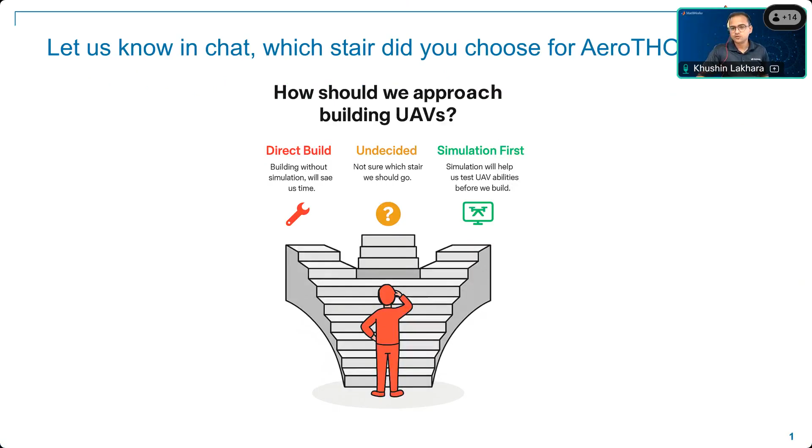Hope all of you are doing well and getting ready for your AeroTHON competition. But before we get into today's agenda, I want you to answer in chat about this picture on your screen. Which stairs are you going to take? How are you building your UAVs?

Let's make it easier for all of us. Let's use R for red color, orange for undecided, and green for simulation first. Let me know which side you are on: are you directly building your UAVs, or doing simulations first and then making your UAVs work, or still undecided how you're doing it?

Okay, are these saying they are going for simulation first? Good, I'm interested to know why you guys are going for simulation. Why not directly build it? Doesn't simulation require extra time?

Anyone other than Adi?

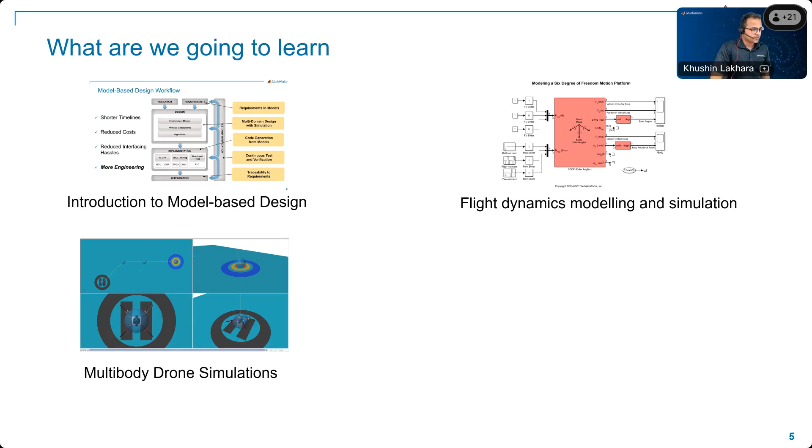In today's session, we are going to learn about simulating drones with Simulink, starting with an introduction to model-based design - what is it about, and why is it important? Moving forward, we'll talk about flight dynamics modeling and simulation - what is flight dynamics, how is it important, why should we do it, and what are the various ways of doing it? We'll also talk about multi-body drone simulations, where your vehicle has to drop a particular object to a target location, or anything where multiple bodies are involved - how do you bring various CAD geometries within the Simulink environment and perform the simulation? Finally, we'll talk about what resources we have for the AeroTHON teams and how they can make the best use of these learning resources.

So let's start with the first session. But before I go to model-based design, I would like to ask the audience: what is your motivation to learn about simulation? What do you think? Why is simulation important for you?

I see a lot of students are there. I see someone named Challenges - I'm believing this is a team name, Challenges. Then I have UIET Fire Flies, Charita - anyone who wants to take a wild guess on this?

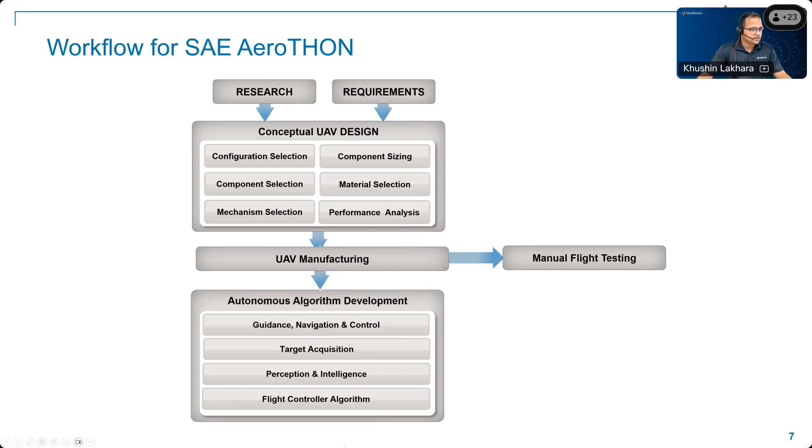So they would work on these algorithms, and finally they integrate with hardware, which makes them ready for the autonomous flight testing. So this workflow, if we compare to what is used in the industry, this is similar to the traditional design workflow, where first a vehicle is designed, then the algorithms are developed and implemented, and finally they are integrated with the hardware. So now let's look closely and understand what can be the problems with the traditional design workflow.

One thing I see is there is no feedback in this process, and if we don't have the feedback, we will not be able to improve our design. So think about you are at integration stage and you found some error which is coming from your requirements change, or which may be coming from any other change in design. And now it has affected your complete design cycle. So how are you going to handle it?

So yeah, that comes with another quiz for you guys. What do you think? What are the problems with the traditional design workflow? Starting from Aryan saying it may be time consuming and repetitive.

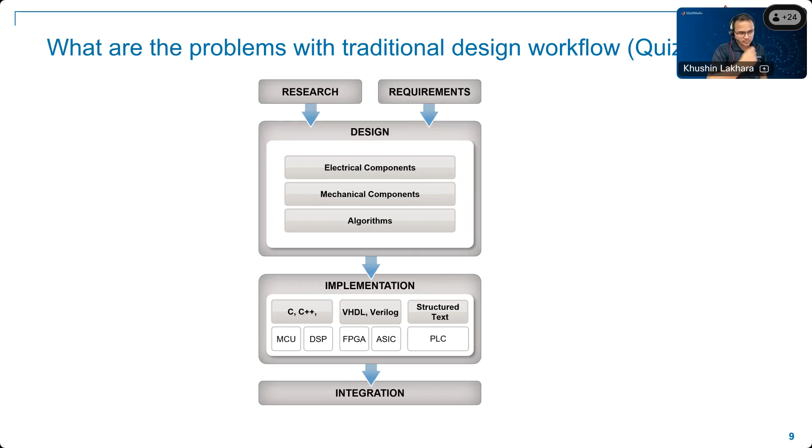Very true, Aryan. So let's explore these problems one by one, starting from the requirements. Requirements are in the documents or written somewhere. So if your requirements are changing, you are not able to make the immediate change in complete design. That means you don't know if your requirement A is changing, which component B, C, or D you need to change in your rotorcraft. That's one of the biggest problems.

It involves physical prototyping. Physical prototyping is obviously expensive, prevents rapid iteration, no system level testing. These are some of the big problems, and they actually make the complete engineering design cycle costly.

Moving forward, it's manual coding, time consuming. Manual coding is obviously time consuming, and because it involves humans, you can always introduce defects and variance, and if some other team members are using it, then it's difficult to reuse.

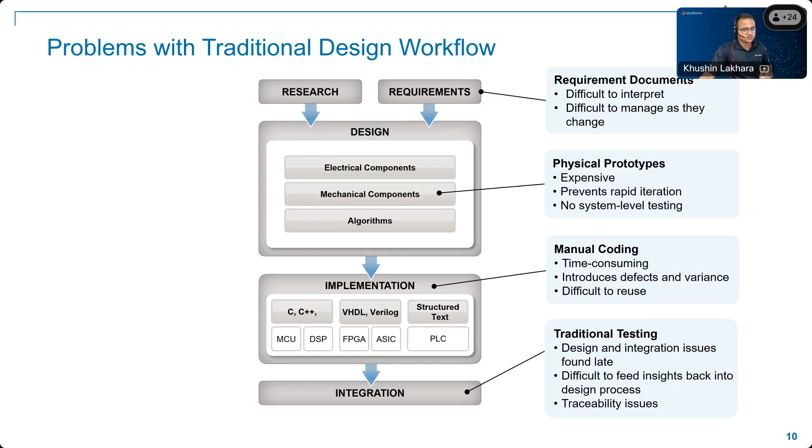Moving forward, they go for traditional testing. So design and integration issues are found very late. Now, if you have any issues in the requirements, you have to go back to the requirements and restart the complete phase. But you are not able to understand that making the change in the requirement is going to impact which subsystems or which components. So this brings the traceability issue.

So what's the solution? The solution is the model-based design workflow, which industry prefers, and most aerospace companies across the globe prefer this workflow. So they put the requirements into the models. These are simulation models, instead of writing them in a Word document and then making the changes in the design.

They mention the requirements in the models, because these designs are multi-domain designs, and you can do multiple simulations. So the requirements are always directly affecting your designs, and you are able to see how the requirements are related to your design configuration.

Moving forward, for implementation, no more manual code writing—you generate the code from models. You don't write any more code, but you develop the algorithm. And for the algorithm, whatever programming language you need, you generate the codes for them—either C, C++, or your hardware's specific requirements. You generate the codes, but from standard templates which are compiled with industry compliance.

And then the main feature is it has continuous test and verification as part of this workflow. So whenever we are making any change, or even at the early stage, we are always testing how our model is going to perform and how it affects the subsystem level, complete system level, and assembly level. So that brings another benefit.

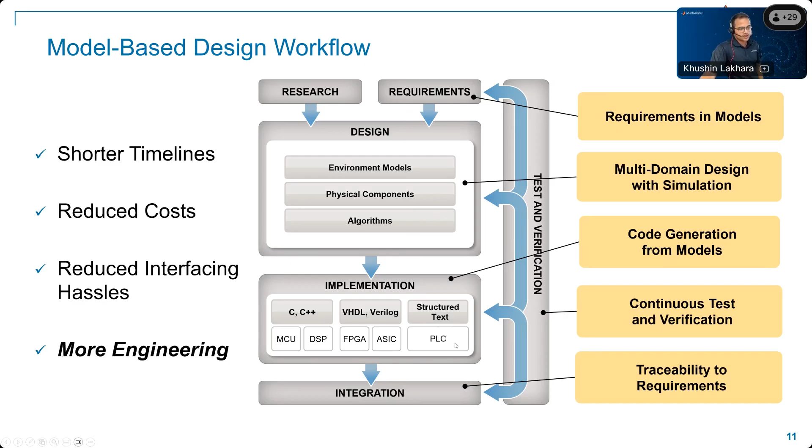So which tools can you use for model-based design? There are tools, MATLAB and Simulink.

If you guys are new to MATLAB and Simulink, MATLAB is the language of technical computing used by scientists and engineers across the globe for numeric computation, data analytics, visualization, algorithm development, and deployment. We have more than 130 toolboxes, starting from audio toolbox to aerospace, with wide industry applications. We also have Simulink, which is a platform for model-based design, used by industry as a block diagram modeling approach for modeling, simulating, and analyzing multi-domain systems. It has automatic code generation capabilities, which saves you from writing code, and has huge applications in control systems, signal processing, communication systems, and more.

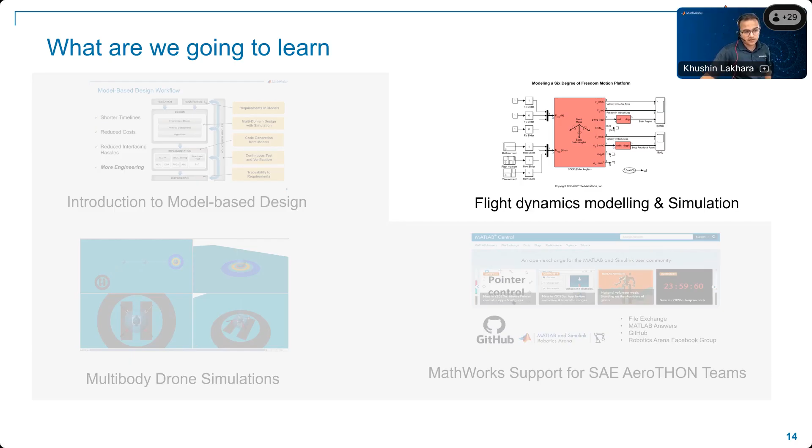Now that we've learned about the tools for model-based design, let's move forward to the main meat of this webinar: flight dynamics modeling and simulation. That's where we're going to do a technical deep dive into the aircraft dynamics of a vehicle, or how an aerospace vehicle actually works.

Before we go there, another quiz: why do we do flight dynamics modeling, or 6 degree of freedom modeling? Why is it important? Can we not just bring the various parts into the simulation model together and see how they impact each other? Let us know in the quiz, I'm waiting for your answers. We have limited time—the more we interact, the faster we go, the better questions we have, the better answers I'll have, and we'll have a much more impactful session. By the end of this session, I want you guys to walk away with learnings you can directly use for your AeroTHON competition.

Om is saying to get the movement of the bodies in 6 degrees of freedom—true, you can. Ishant says to be able to trace the trajectory of the drone. If you can trace the trajectory of the drone, you can see if your vehicle will be able to complete the mission or not. Ashish says since the UAV's whole system is like a Rubik's cube, every movement needs to be taken into consideration. Yeah, true—a drone is a free body, unconstrained, or inertial relative body. So yeah, it's a free body.

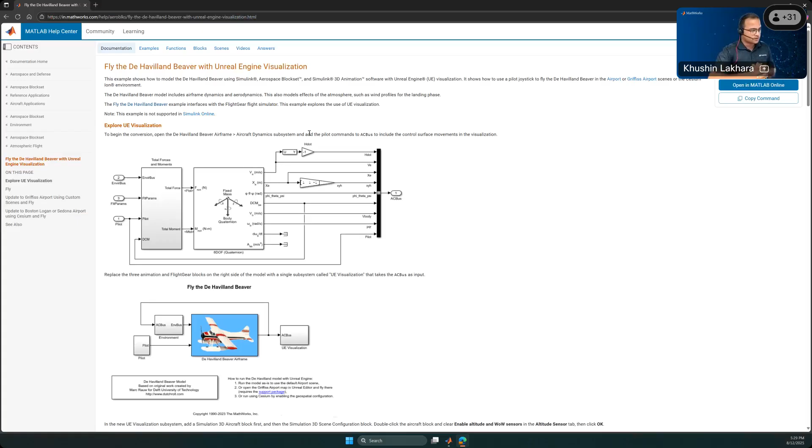This example that we are going to share here is easy to access — I'll share the link in the chat, but let me show this for you. So if you search for the De Havilland Beaver Unreal Engine visualization — MATLAB has a large documentation for most of the workflows, and you can search about simulating your aircraft, simulating rotorcraft, or whatever terms you have, and you may land on some of the most relevant documentation. So this is the example we have, and I'm going to copy this command from here and quickly go to my MATLAB and call this example here.

Before we get into the simulation, let's talk about a few more things. We talked about what a simulation needs — how the 6 degree of freedom and equations of motion are needed. But in order to create a simulation, we need something more. So what are these things?

Here we were talking about aircraft dynamics. Aircraft dynamics includes your various forces and moments along with your 6 degree of freedom equations of motion. Now consider if you have this aircraft dynamics available, we may be knowing the initial states of our vehicle — is it at the ground ready to take off, or is it already in air? What is its speed? What is its orientation? So if we have this information, these are all the information parameters, the state parameters that we consider.

If we have the information about states and we are putting some control, this control is you. In the case of fixed wing aircraft, it may be your engine throttle or control surface deflection. But in case of rotorcraft, it's mostly the throttle of various rotors.

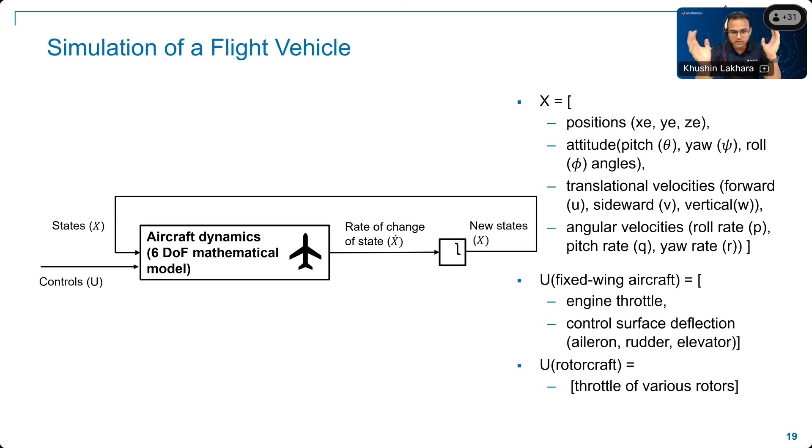What do you think is still missing to make it a realistic simulation? To bring in the conditions in which you are going to fly the aircraft, what is missing here? This is just the basic parameters we got, all the X parameters. So just looking at the numbers, will we be able to do good with the simulation, or do we need something else? What can be the additional things we may need here?

In the meantime, let me go to MATLAB and bring other things into the simulation.

Okay, so this model, when we give this command, the simulation model will open. Let me open my simulation model. So this aircraft simulation model is available. Yeah, this is our aircraft dynamics.

Let's get into this, what we were discussing on our simulation. So this is our aircraft dynamics model. As we were discussing, we need to calculate first total forces and moments and feed that through the 6 degree of freedom equation of motion. Through the equation of motion, we will get all the parameters.

So we can see here, we are putting in all the forces and moments, and what we are getting out are the velocities, the positions, phi theta psi which are your orientations, and direction cosine matrices, which are useful to change your navigation and aircraft's motion from body fixed frame to the inertial frame. Also, we are getting various velocities, angular velocities, and acceleration.

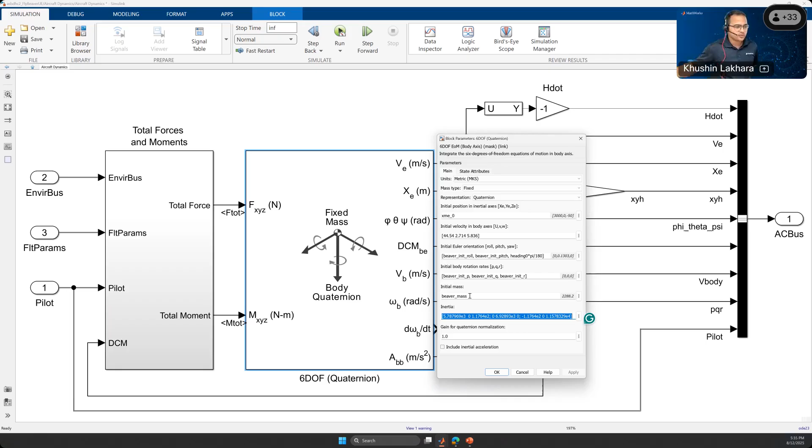Let's get into this total forces and moments, because it is getting the inputs of total forces and moments. But you would be curious, where do we get this 6DOF simulation block? Any ideas, guys? If anyone is already using Simulink, can you let us know? If I delete this and want to get the Simulink block again, from where will I get it?

You may be thinking I have messed up the Simulink model, my simulation model has gone. How will it work? I don't have the equations of motion. Do I need to code for it?

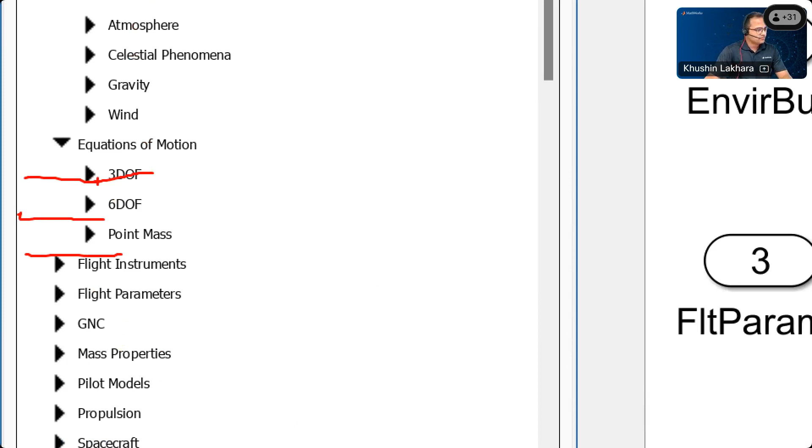We'll talk about when you should use point mass and when you should use 6 degree of freedom when we discuss the various fidelity levels. But understand that if your system has only 3 degrees of freedom, or you want to study only a few motion parameters, you can go for the 3 degree of freedom as well. But for the full vehicle study, you should go for the 6 degree of freedom.

If you go into the 6 degree of freedom, you will see there are so many blocks available: Euler angles, quaternion, ECEF, wind, six degrees of freedom wind. All these blocks are available here. It's very easy to bring this block, just a drag and drop approach to place it here.

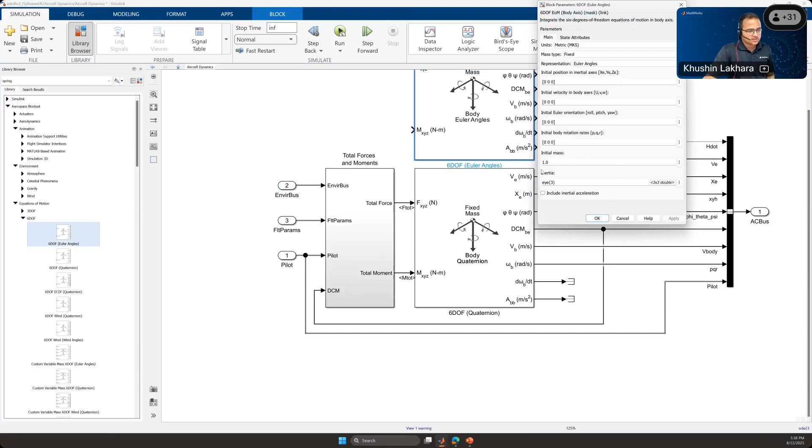Let me bring it here. And now if you open it, you'll see that all these parameters are initially 0, 0, but you can change these parameters, how this was done for the existing 6-DOF model.

Now in Simulink, it is quite easy to connect the signals. Simulink is all about flowing signals from one parameter to another, and that's how you connect your input output from one block to another block. So you're not doing the coding, but you are actually programming in a graphical environment.

Let me delete it and let's move forward and see what we've got in the equation, total forces and moments. If we get into the forces and moments, you will see it is getting 3 inputs: pilot, flight parameters, and also inputs from the environmental parameters.

Let's talk about the pilot parameters first, which are nothing but the control of your vehicle that you are giving. Then we have the flight parameters, depending on what is your angle of attack, what is your side slip angle, how the air is impacting your vehicle - these come as flight parameters. Finally, environmental parameters are there, which include your gravity and density. So these are three major parameters we get as inputs.

But if you look at this, there are three major types of forces we discussed here: aerodynamics forces, engine forces - which are nothing but propulsive forces - and then we have the gravity forces.

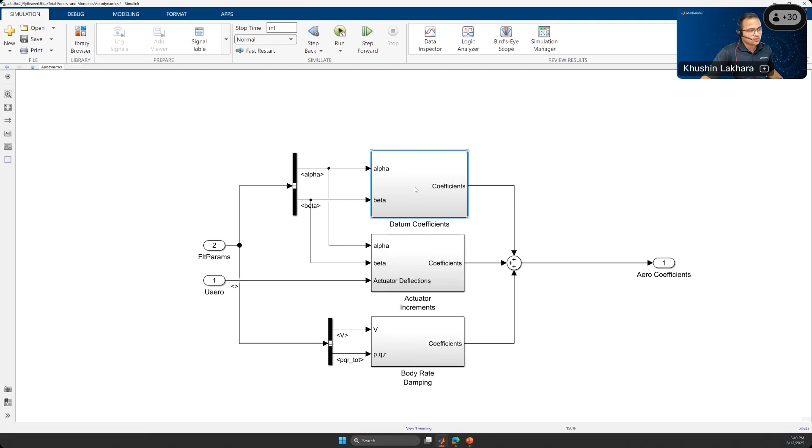If I get into the aerodynamics, you will see it has the aerodynamics equations in detail, brought together and summed. All the aerodynamics coefficients we get have been calculated: Cx alpha, Cyl, Cy beta. All these are calculated and used here as a single value. You can see that Cx alpha has this specific value of 0.00292. This value has been given and the system takes it, and accordingly makes all the calculations. That's how you do your aerodynamics modeling.

Similarly, you do the propulsion modeling and gravity modeling. So now aerodynamics and engine forces, which are propulsive forces, actually contribute to your forces and moments both. But kindly note, gravity does not contribute to the moments if you are calculating all the moments about your center of gravity.

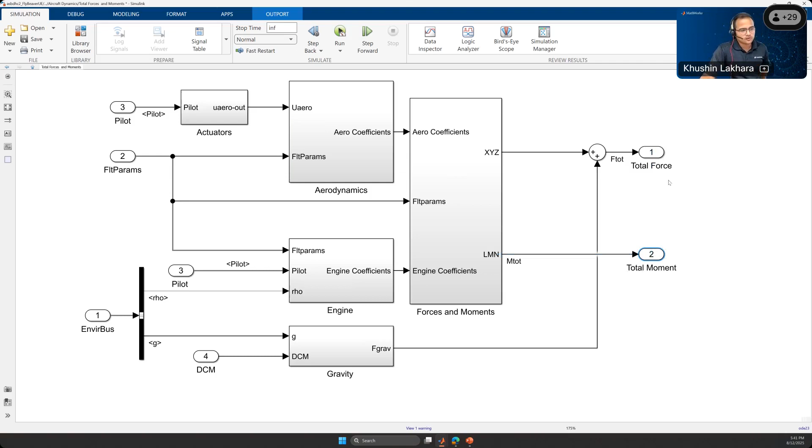And this one, we are calculating about the center of gravity. So we do not have contribution to the total moment, but we have contribution to our system here, as total forces only, not moments. So that's how we are doing our total forces and moments modeling, and our 6 degree of freedom modeling and aircraft dynamics.

I know we have learned a lot of things. Before it gets boring, let me show you, if we run this simulation, how does it look like? So we have something exciting, that's why we are learning about it.

Okay, this is my simulated aircraft environment. My aircraft is flying, my hands are free. You can see no pilot is controlling as of now, and my aircraft is just crashing. Although I have a pilot joystick here using which I can fly, but I'm not using it as of now. And you can see my aircraft has crashed and went into the ground. But this is the photorealistic simulation we have.

Let's run it again and see. So we saw that we have an aircraft body which is flying. Then we had an airport environment where our aircraft is supposed to land, but it crashes, that's a different thing. But our aircraft is flying over an environment, so this is our 3D scene along with our 3D aircraft body.

Now the idea is how are we going to get this visualization? So are you excited to learn how you can get these visualizations and all the parameters from aircraft dynamics? These motion parameters, velocity, your location, position of your vehicle, how are you converting them into visualization? Are you excited to learn about that? Let me know yes or no.

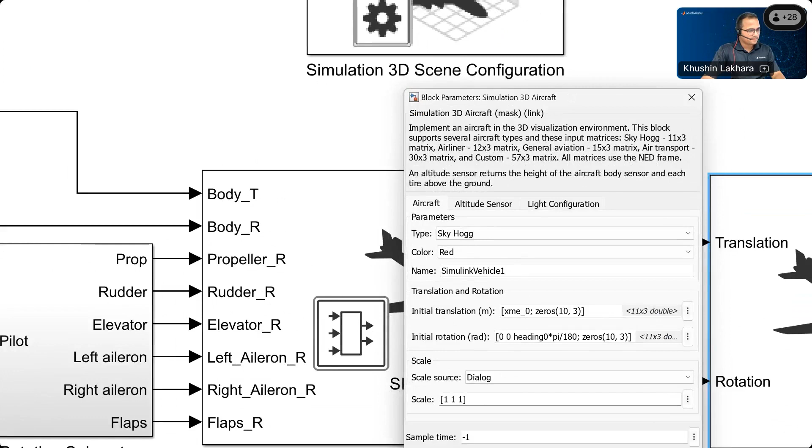So if we go here, let me just zoom it for you guys. You can see here that we have an already existing aircraft, the Sky Hogg aircraft, which is mentioned here. Then we have the name of the Simulink vehicle. We have also mentioned initial translational and rotation.

You would be thinking, we already mentioned the initial translation and rotation in the 6 degree of freedom block, so why are we doing it? When we do it in the 6 degree of freedom model, it's more for flight dynamics calculation. Here, when we're doing it, it's more for visualization purpose. Now we are bringing our vehicle into a 3D environment, a 3D world, where we should tell, hey, in this world, my GPS coordinates are XYZ, or my location is X, A, B, C. That's the purpose for mentioning the initial location, initial translational rotation here.

You would be thinking, good enough, we do have the Sky Hogg aircraft, but can we bring our own aircraft? Does anyone have this doubt, whether you can bring your own aircraft or not? Just let me know in yes or no, you can just type Y or N, that's fine with us. Yes, yes, yes. Okay, good enough.

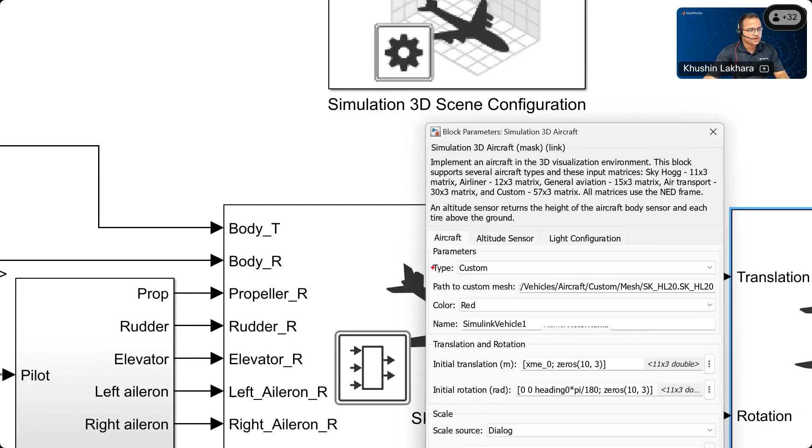Let's see. So if we have this in Simulink, instead of type, we can go for the custom aircraft. And once we go for custom aircraft... okay, I have selected the airliner, my bad, let me select custom and resume it. So once we go for the custom aircraft, it will ask you for the path of your custom mesh.

Once you select the type as custom, it will ask you for your path to custom mesh, and that's where you can bring your own vehicle geometry. Right now we're taking the example of a fixed wing aircraft, but even if you have a rotorcraft, you can bring your own rotorcraft geometry here as a mesh. Even if you have the STL geometry of various parts of your vehicle, we can bring them together and do a multi-body simulation.

That's how you can customize your aircraft for this simulation. You'd be curious about how we're giving the motion of each parameter, which control is assigned to what, and how it's done. If you see here, this block, Simulation 3D Sky Hogg pack, is doing that. It's mentioning whether to give it to propulsion, controls, or landing gear. All these component assignments you can do, and you'll see their motions when I fly it with my flight controller.

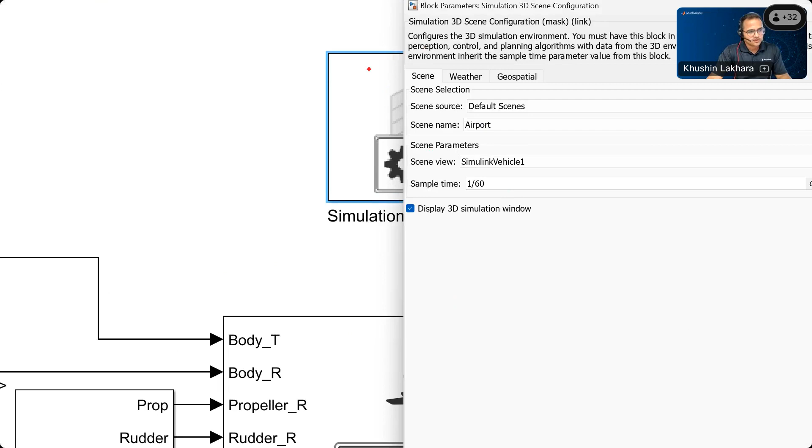The next is Simulation 3D scene configuration, and that's the major thing. You've seen in the simulation that we have a custom airport scene, and you can see scene sources are available, default scene and airport scene. But you can bring even your own custom scene. There are Roadrunner workflows where you can bring your own scenario and do it. Let me bring one scenario and see if that works.

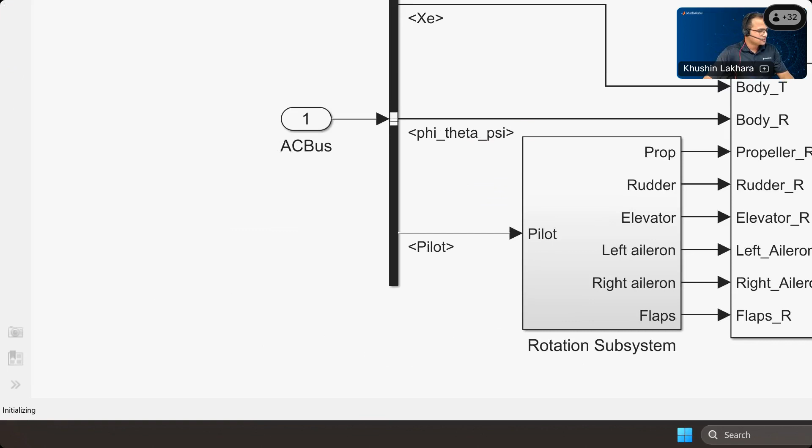Whenever you're seeing in Simulink that your model is running and taking time, you can always see its progress here at the bottom. Right now it's showing that it's initializing, and soon we'll be able to see how it's progressing forward. It's a custom made Simulink environment, Sim3D environment, which takes time when we first load it. Let's see if it is the right, correct one or not.

The environment has started here, but earlier you were seeing the airport, now you don't see anything. The reason for this is it's a free environment, it didn't have anything in it. But using various keyboard controls, I can change its motion and the camera views, all these views are available that you can change. You can develop your own custom scenario and do it.

Now let's get back to our original scenario and explore further. So think about a situation where you have your competition in November, but before that you are building your own Roadrunner scenario, importing it into your simulation environment, and flying your rotorcraft in that environment. Does that excite you, or do you feel you guys should do it? Let me know yes or no.

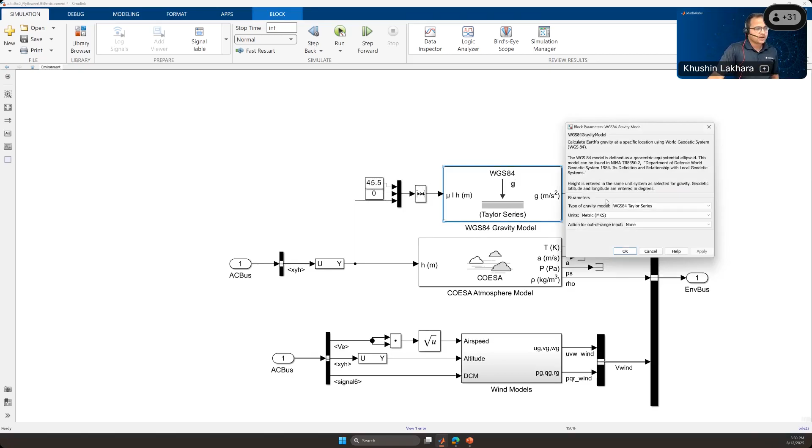So these values, 45.5 and 0, are nothing but latitude and longitude of a location, which we are feeding in, and altitude is continuously fetched from your vehicle states. It has a gravity model which takes care of this. Similarly, we have an environmental model which is calculating your temperature, speed of sound, pressure, and density. For this simulation, only density is important, so we're ignoring other parameters and just using density as the main parameter. You can see that gravity and density are going here.

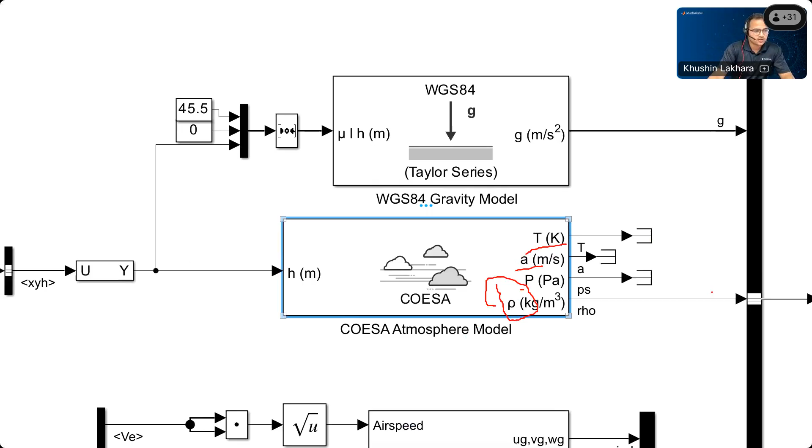Similarly, we have wind models. In the wind models, we have various wind directions and their effects on the angular velocity directions as UG, VG, WG, PG, QG, RG. UVW are your translational velocities, and PQR are your angular velocities of wind.

So with these wind models, we actually feed it to the aircraft dynamics. Let's get into the environment bus again. You can see that when we come into the environment bus, all these parameters are contributing for the wind - UVW wind, PQR wind, and your vehicle's actual PQR and UVW are getting added. And this brings the effect.

Think about it - if your aircraft is going forward and it's a headwind, then your aircraft will face some more resistance and it may get slower. But if it has a tailwind coming from backward, it may push your aircraft faster. So you can bring your environmental effect into your model.

Now, can you tell me a condition how this environment modeling can be useful for you guys for AeroTHON? Some teams are coming from north, some from south. I'm not sure where the final is going to be - Bangalore, Ladakh, or Kolkata? I'm sitting in my university or office, but I'm building a rotorcraft which should perform specifically at the particular location where my competition finals are going to be. So do you think bringing all these environmental conditions here - the right gravitational acceleration parameters, the right wind models you can face during the competition - can help you optimize your vehicle performance? Let me know yes or no.

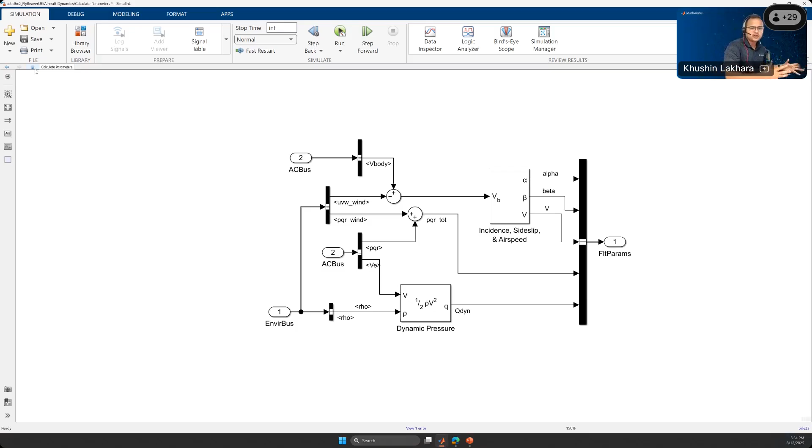The idea of bringing the environmental models here is to make your drone be tested in virtual conditions which are closer and closer to the real conditions you can feel. That's how this industry is investing time and money in model based design, because even before building their drones, aerospace vehicles, or any machines, they can test them in actual conditions without costing them money. You saw my aircraft crashed twice, but it didn't cost me anything because it's a model based design environment.

Let's move forward and see what we can do. Right now I have this pilot model here. In the pilot model, we have a pilot joystick block from the aerospace blockset. You can get this, and using this pilot joystick block, you can connect your RC controller with a USB. So this is my USB cable, my RC controller is connected through USB to my system, and I'm going to fly this vehicle now into the simulation.

Let's see if I'm a good pilot or not. I don't think so, but let's give it a try. Maybe your pilots can actually fly your vehicle in this simulation. Let me bring it back to the original one. Okay, no - you can see I can make the changes, and okay, I'm not a good pilot.

That's for sure. But think about your pilot getting trained, or your pilot testing your drone's capabilities and performance by connecting the RC controller with your environment. He is doing the same work he could have tested in flight conditions. But the benefit of this flight simulation is that you get all the aircraft data here in the Simulink environment, which you can use to analyze your vehicle capabilities. If something is going wrong, if your aircraft or rotorcraft is crashing, you can always analyze this data and test your vehicle in the particular condition to find out where the issue or error is.

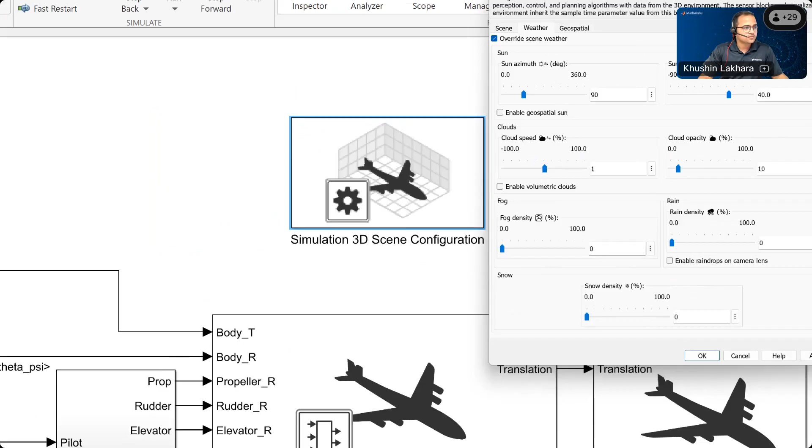So how are you going to make the pictures for how your model is going to take care of this? Here the simulation can actually help you. If you can see on my screen, I have this simulation 3D scene configuration block. Here you can see we have a weather model where you can actually make changes in your sun conditions, sun altitude. Similarly, you can go with the clouds, how your clouds are doing.

I want you to check this rain thing, the rain density percentage. We are going to shower some rain in our model and see how it looks, and whether we can record these simulations and get some pictures out of it which we can use for the simulation model. But let's first set my rain density—say I want some good rain, so let me make it around 20%. We put okay.

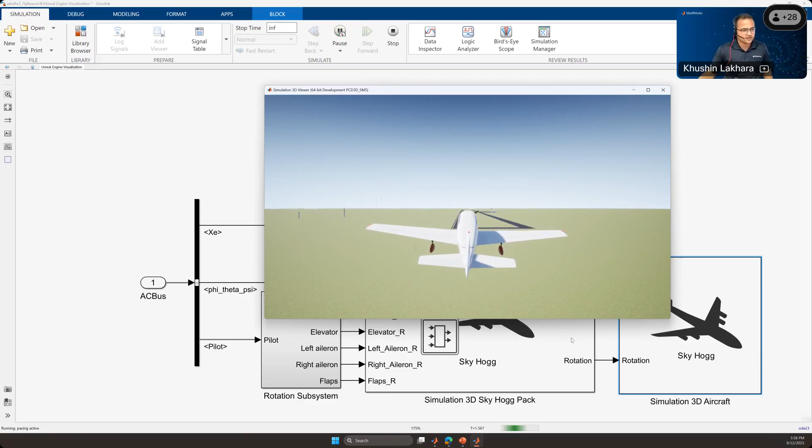And let's see how my simulation model performs. I'm not going to fly it again with my RC controller, but do you see some rain coming? The rain effect has come. So we can increase the rain density, and we can make all these environmental conditions change for visualization.

We can place a camera on the vehicle and capture all the images from the simulation model. Capturing the images from the simulation model is called synthetic data generation. How do you capture this synthetic data? We'll talk about that later on.

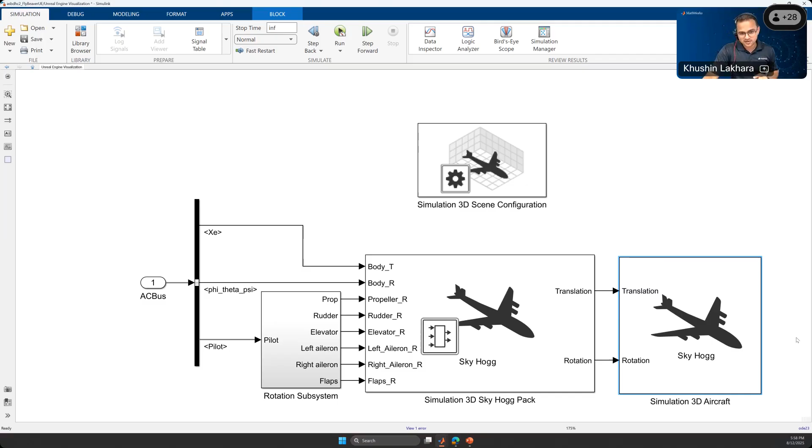Let me know who are the people who are going to try these environmental condition changes, or weather condition changes, for your competition. Let me know yes or no before I move forward.

Oh, wow, good, good. I think if the people who said yes adopt it, my webinar work is done, because the ultimate aim is to help you guys adopt industry tools and industry workflows, which can cut down your time so that you can not only focus on your AeroTHON competition, but also manage your academics well.

So let's move forward from the simulation, and let me talk about the resources that we have. We talked about the 6 degree of freedom model block.

So we talked about the simulation models, but you would be quite interested in where you can learn more about all these resources. Let me show you something exciting. If you search aerospace blockset, you may get a lot of such capabilities introduced on this page—how you can do atmospheric flight simulation, spacecraft flight simulation, and flight visualization.

I've shown flight visualization—if teams are interested to work with us to create and test their scenario for the AeroTHON conditions, especially creating the visual scenario, teams can connect with me and I can help you develop that scenario with Roadrunner. And for all teams, we are giving MATLAB and Simulink licenses for this purpose, so please feel free to connect with me.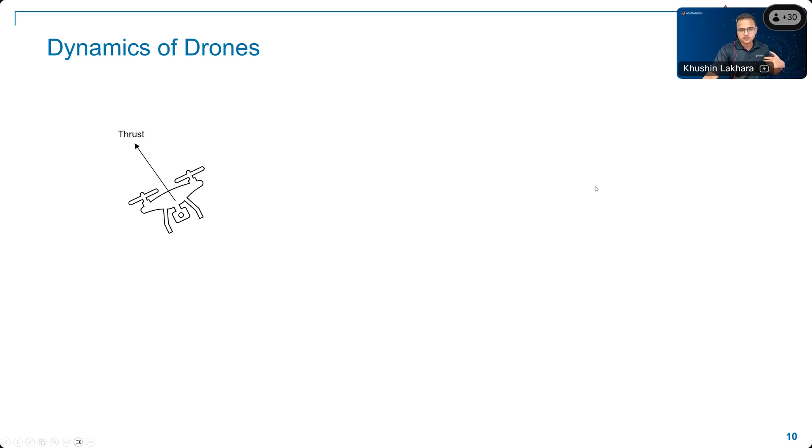But if you look at the forces acting on a vehicle which is a rotorcraft, you will see that obviously the motors are running, and because of the motors, thrust is generated. So thrust is always acting upwards in this case. Gravity always acts downwards, and gravity's direction doesn't change with the orientation.

So thrust is our propulsive force, and weight is our gravitational force. The third force is aerodynamic force, which includes lift and drag.

When we take the components of thrust, one component goes as lift and another goes as the forward motion force. So these two, lift and forward motion force, are the components of your thrust force. And because of the forward motion of the vehicle, if we're not in a vacuum but in the actual environment, the vehicle faces drag, and drag acts backward.

So that's the simple flight dynamics of your vehicle. Now, no major changes are needed to model your aerospace vehicle or your rotorcraft in the flight simulation. We just need to take care of the direction of the forces acting, and by implementing this, we can do it.

But before I go forward, I have a small question for you guys. Consider I have two configurations of drones. In configuration A, the rotors are rotating in the same direction. In configuration B, they're moving in opposite directions. What do you think? Which configuration will provide stable motion, A or B?

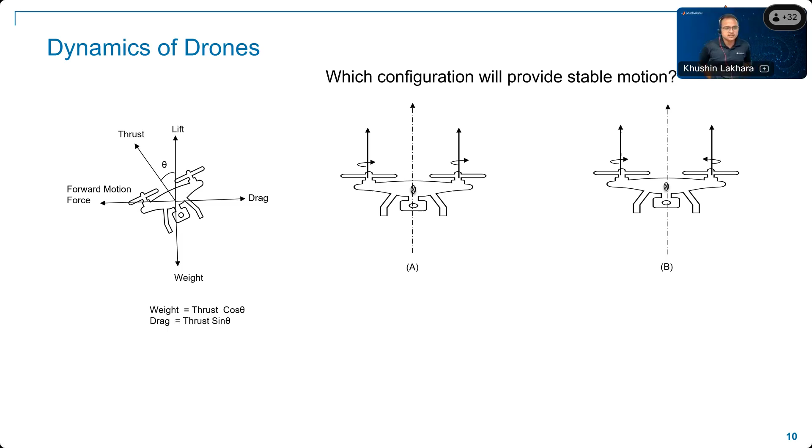In the A configuration, will you counterbalance the torques? These aren't torsion forces, but you need to counterbalance the moments created by both rotors. But I was curious what would happen if I moved both rotors in the same direction, so we tried it, let's see how it does.

So if it goes, this is a small video I have, and you can see this. It's continuously yawing, it just lost control, and somehow it crashed. So we need to counterbalance the moments that come from the various motions.

So you'll see that for the rotorcraft, the diagonal rotors always rotate in the same direction. With this understanding, there's much more about how we should control the rotors, which motor should get more thrust, which should get less throttle. We'll talk about all of this in the next section, where we discuss the controls of these drones. So till then, please hold your curiosity here.

Now we'll move to another example and see how this is implemented for the rotorcraft. But a quick check before we go forward.

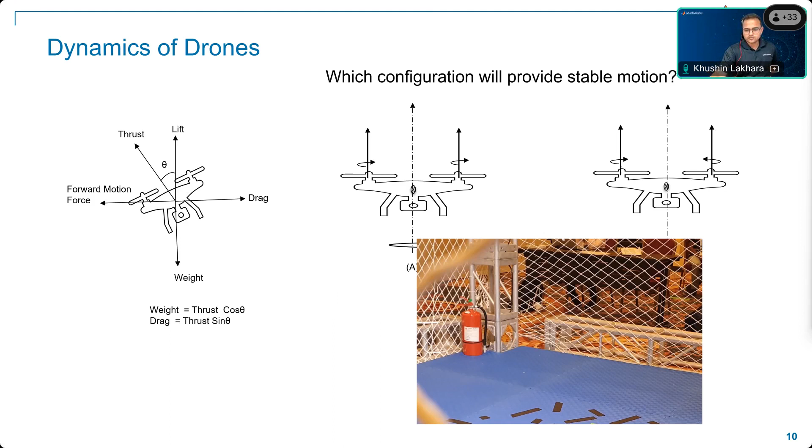Okay, now we talked about a few good things here, right? We started with the example of how we can develop the flight simulation. But let me pose a question to you before we go forward. You saw here that along with the equations of motion, we need various information about your aircraft's aerodynamics and propulsive forces.

What if, at the start of competition in phase one, you haven't built your vehicle yet and you want to test your planning algorithm? Or consider another scenario: one team is responsible for aerodynamics analysis, another team is responsible for avionics and the autonomous part. Will you make your autonomous algorithm development team wait till your aircraft's aerodynamics data is ready?

Would it be the right approach? No. But we are doing good simulation, right? We're getting the full flight simulation capabilities here. We know we need the aerodynamics data, the propulsion data, a good estimate of your vehicle, and the inertia of your vehicle, because we need to provide all this information. But what if we don't have this information?

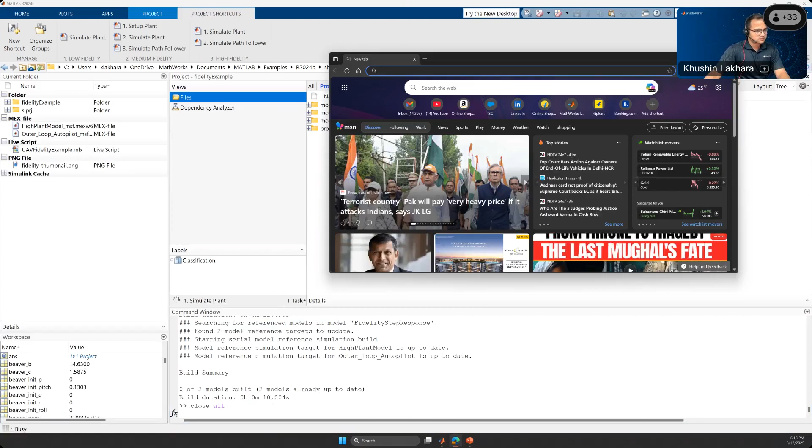So we have this low fidelity to high fidelity UAV model transition. I'm pasting the link to this in the chat where you can learn more about it, but let me give you a walkthrough in Simulink.

As this infographic says, in the low fidelity model you have the lowest information available. Moving forward, when preliminary aerodynamics information is available along with your motor selection and design specifications, then you go for mid fidelity. Once all your sensors are procured, your sensors are frozen, your controller is frozen, then you can go for this high fidelity modeling. Let me show you where did we start and where are we going.

But before that, I want you guys to answer me one question. This RC aircraft simulation model that we have - do you think it's an open loop simulation or a closed loop simulation? Let me know in the comments. Is it an open loop simulation or closed loop flight simulation?

It's an open loop, I think. How are we closing the loop here?

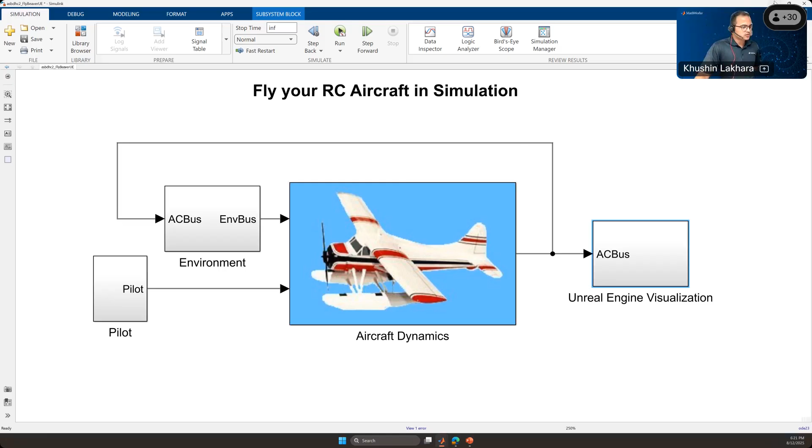Exactly, it doesn't have any sensors. Correct, Ishant, it doesn't have any sensors giving it information. So moving forward, we'll see how the closed loop flight simulation comes. But before that, let's get into this example and see how the open loop flight simulation works.

So I have this low fidelity simulation plant model available. Let me open this and show you what information it's got. This is a very simplistic model, doesn't involve so many things, but we'll be able to see the very basic vehicle behavior or control behavior for an estimated vehicle, and also see what parameters it's got.

So you see here, we are getting step control input as an airspeed that we want to control, and we are giving it as an output again. The low fidelity model is getting the control inputs.

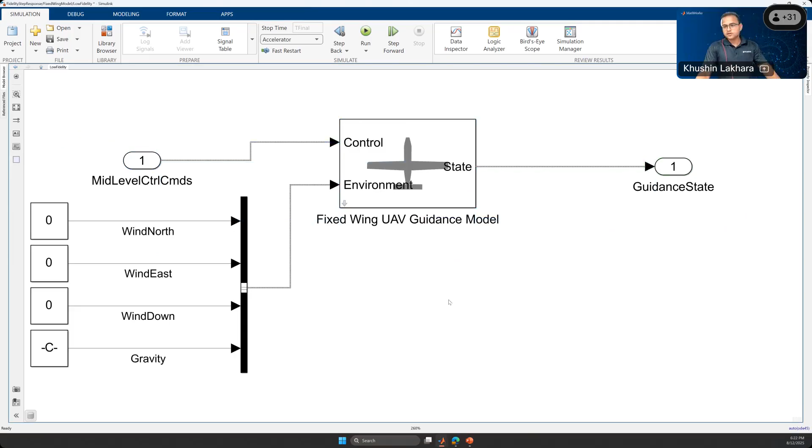Let me make it easier to visualize. Can anyone let me know if it is readable for you? Is it readable? Okay, good.

So it is taking the control input, and we saw in the control input we didn't have many parameters, just the one input we gave that we want to control the airspeed, which has the step control. You can see the step control here, this is what we're giving into the fixed wing model aircraft.

And now the environmental parameters, we are giving the wind parameters and the gravity parameters. But let's get into this UAV guidance model and see what information it takes.

If you see here, this is taking your initial state. Yes, it's taking the information about configuration. It's taking the input output bus names. So what are our input output bus names, controls and environment bus names.

We'll see it here. Now if I go into the depth of these parameters, initial states you see north position, airspeed, these are fine. These parameters we gave in the 6DOF as well. But in the 6 degree of freedom high fidelity simulation, we also tried to bring various forces and moments, and we calculated all the forces and moments. So where are these forces and moments? We are not considering these forces and moments here.

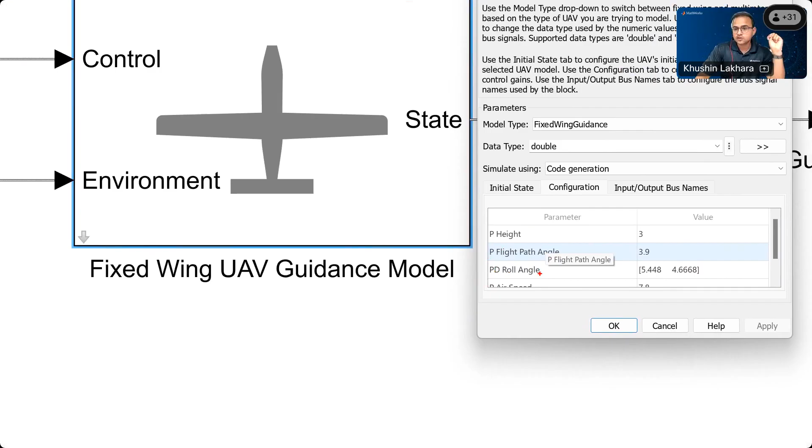This is a very high level reduced order model for a closed loop system, which includes your UAV dynamics and autopilot. Now if you look at the variables it considers, it's considering the gains. What is your P height, for your height controller, what is your PID controller's P gain? Similarly, what is your flight path angle's P gain? Then PD roll angle, for roll angle what is your PD? So all these parameters actually need to be mentioned here.

So what you are giving here is, think about, your flight controller's gain.

This may be your adequate performance that you want to achieve from your controller, and you are putting it here. It is a reduced order model, so you don't have the information about your aerodynamic forces, gravity forces, your vehicle mass. But what you are getting is you are going to give its control inputs.

Now, when we talk about closed loop flight control simulations, what happens is from your sensors, all the data of state parameters is collected, and this data is fed to a guidance algorithm. This guidance algorithm develops the desired control command, which is fed to the controller.

Here, we are just seeing that only the control parameters it is taking. We don't have the sensors, we don't have a guidance system, we don't have the information about the plant, but still we would be able to implement it over vehicles, and still we would be able to test our guidance algorithm here. So that's called the low fidelity simulation model.

Are there any doubts related to the low fidelity simulation model, or should we move to the medium fidelity? Let me know in the chat if you have doubts.

I see so many names. Ishant saying no. Ishant is consistent, very consistent with the session, consistently answering these sessions. I saw a few names, Ishan, Adi, Ronak. These few students are really great guys, giving good attention. Sorry if I'm missing the names of others because in the chat it's going up and down, but you guys are doing wonderful. Keep learning, keep growing.

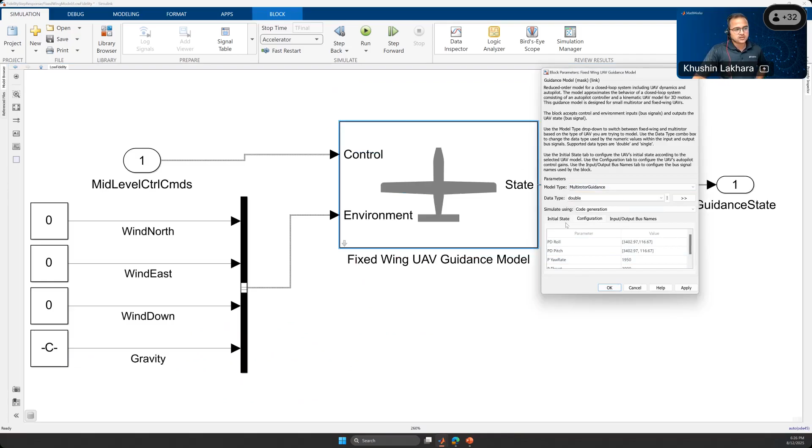So what is it taking? World position, configuration, the same parameters. It's taking your mass, your thrust, your rate, PD control parameters, and it's taking your initial state parameters. So don't think it's just for fixed wing aircraft, it is for rotorcraft too, you can also use it. Let me set it up for the medium fidelity plant and go for it.

So now you observe here the low fidelity plant model. Let me set it up for the medium fidelity plant, and let me simulate this.

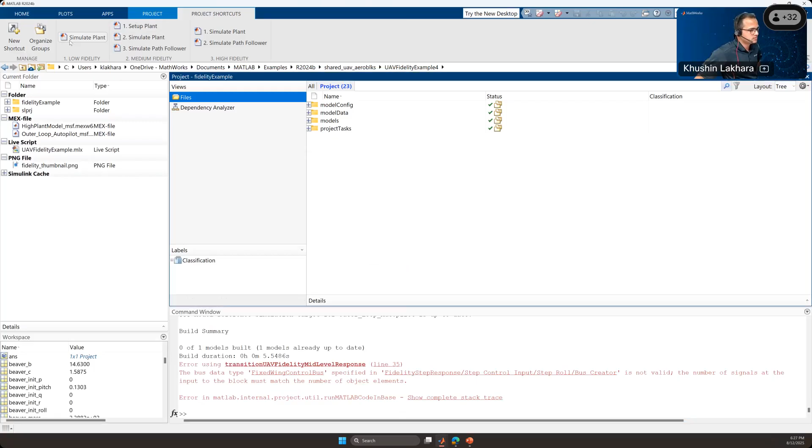Exception, it's busted. Just a minute, guys. Looks like there is some error on my end because of not closing a few things. Let me reset it.

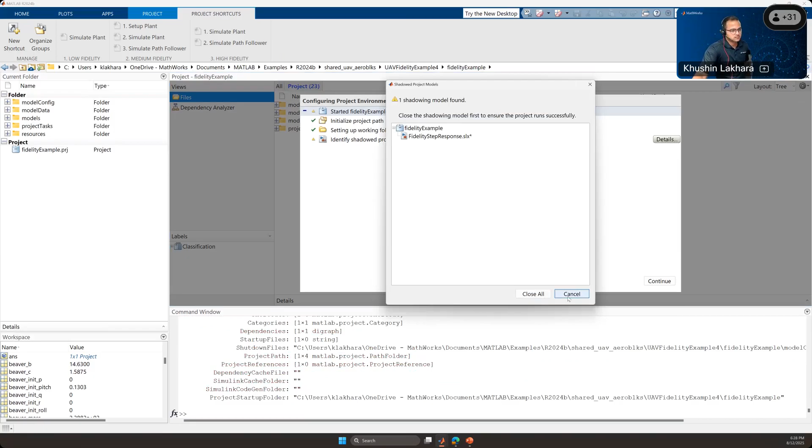Okay, let me just restart it. Till the time I restart this example and show you the next things, let me know guys what if you have any doubts, because we have the next 30 minutes and we have two more topics to cover.

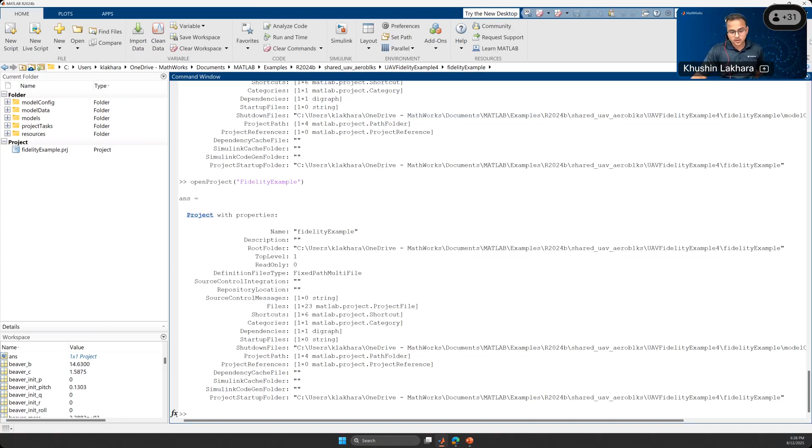So before we get into the various fidelity models, one question I have, let me know: do you think you always need the photorealistic simulations we saw in the high fidelity simulation model, how we had the complete airport scenario? Do you really need it? Or at what stage do you need it?

So we have photorealistic simulation where you bring the 3D scenario. We saw there was an airport, but for such an airport scenario, do we really need it? Or do we not need an airport scenario?

Just a 3D model and ground for reference. In things like disaster management, where mistakes cannot be an option, simulations must be photorealistic, I guess.

True. So when we go for the photorealistic simulation, the benefit of it is you can actually click pictures of the environment and use it for your model development as well. Like you want to train your neural network, or you want to train your image processing system, you want to test it. For all these purposes, we need it.

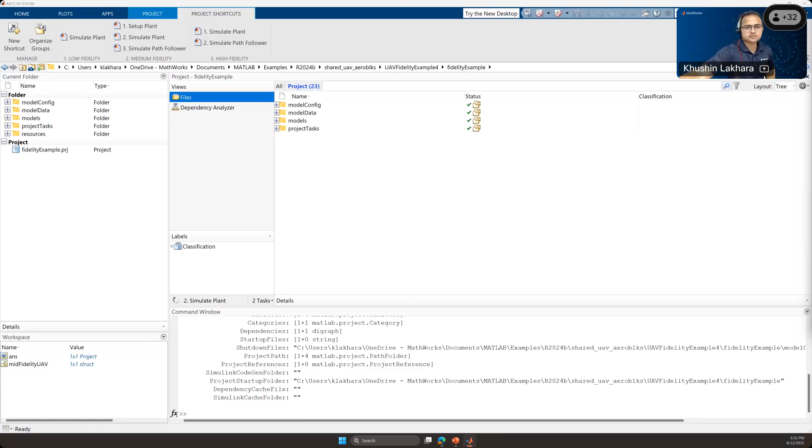This is my medium fidelity plant model. This is because I have restarted MATLAB. Whenever we restart, it takes some time, but no worries, it will give us results.

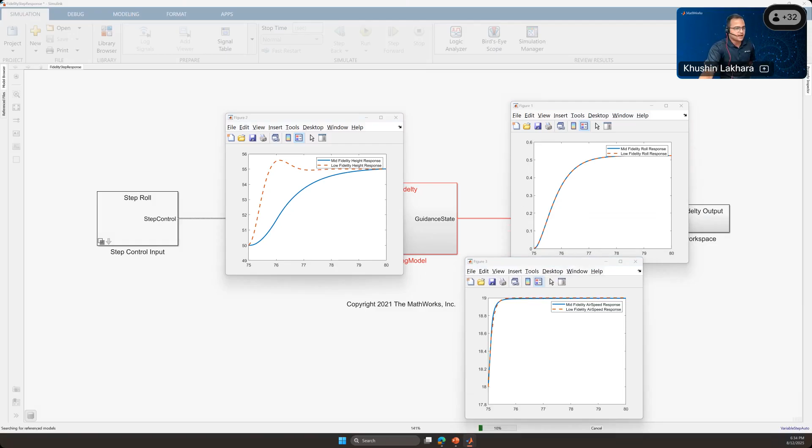So this simulation model is running and continuously I'm getting these curves generated. These curves are nothing but our visualizations, and as I said, every time you may not need the photorealistic simulation. Sometimes we just need these curves to understand how a system is behaving. You can see that for low fidelity response and mid fidelity response, how my system was behaving differently. Low fidelity response is with the orange dotted color, and medium fidelity is with blue color. So some response we see matches, some doesn't, and yeah, that's how it works.

More and more fidelity you get, you will see there are few parameters you need to fix, few parameters you need to involve, and that's how you actually continuously take feedback from verification and validation and update your system, optimize your system.

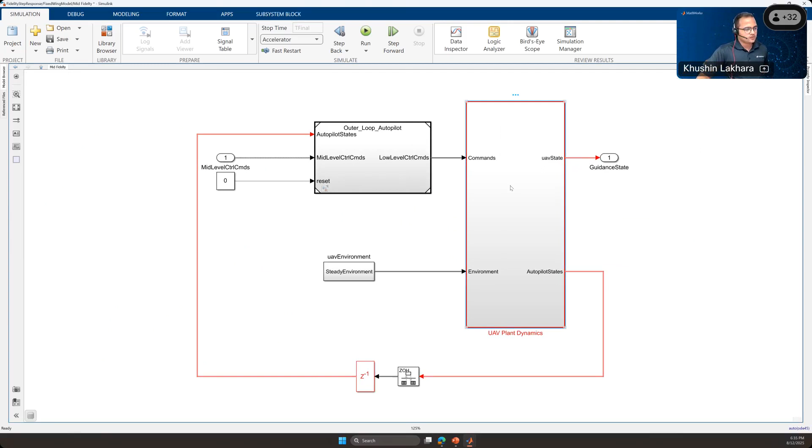So these are the results we got, but let's say we are more interested in getting into this model, the plant model we have. So now if we go into the UAV dynamics plant model, what we see here is vehicle dynamics, and vehicle dynamics here shows a fixed wing UAV point mass model. So let's get into the point mass model.

It's taking all your initial cross range, down range, altitude, initial airspeed - it's taking all of these parameters. These are similar to the 6 degree of freedom model, but one thing to notice here is it is directly taking the forces: lift, drag, weight, thrust. Earlier in the last model where we were working, we had all of lift, drag, weight, thrust computed separately, and then we were feeding them as total forces and moments. But for fixed wing UAV point mass, when we don't have the complete information, if this basic information is available, still we can make it work.

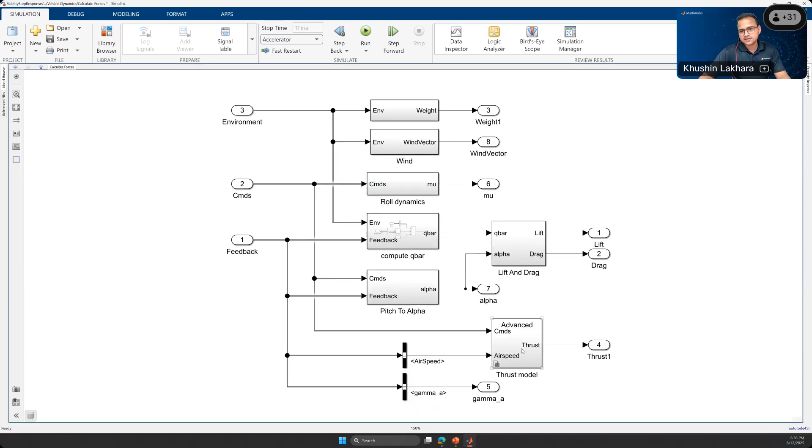So let's get into calculate forces and see how detailed it is. We are seeing that even the wind is calculated within here. We are seeing the roll dynamics is calculated here. For aerodynamics, they are just calculating lift, drag, and thrust - no other detailed information. And that's the level of simplicity low fidelity modeling and medium fidelity simulation brings. We started with high fidelity simulation modeling to understand what all do we need.

As we start our design process, we may not have all the design parameters, but sooner we start gathering all the design parameters, all the aerodynamics parameters, your mass parameter, your propulsive parameters, and that's how you bring them together and bring your flight vehicle closer and closer to your realistic condition.

So let's go for this final high fidelity plant model before I show you how do you do the synthetic data generation. Let's go for the simulate plant model.

We are setting up this high fidelity model. This is a project mode in MATLAB where you can create your own shortcuts and set your system. Whenever I hit a shortcut, behind it is running a MATLAB file which sets up all the parameters in such a way that it selects your low fidelity model, medium fidelity model, or high fidelity model. At last I'm going to show you that all these models, low fidelity, medium fidelity, high fidelity, is only one Simulink model.

Think about everything just at one place, we are just working on one model. So it should start. Let me close the previous results so that we can see the new results. Okay, good, we have these results started popping up.

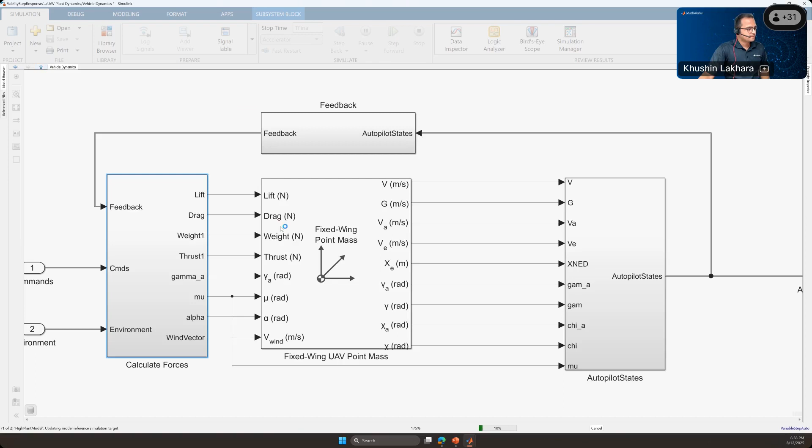One quick question, guys. What do you think at this stage, if your team starts working, at what level is your team going to work? Are you going to work on the low fidelity model, medium fidelity model, or high fidelity model? What is your current stage? You guys have just completed phase one. You have done some simulations, CFD simulations, or your thrust bench test. You got this data. How are you going to bring this together?

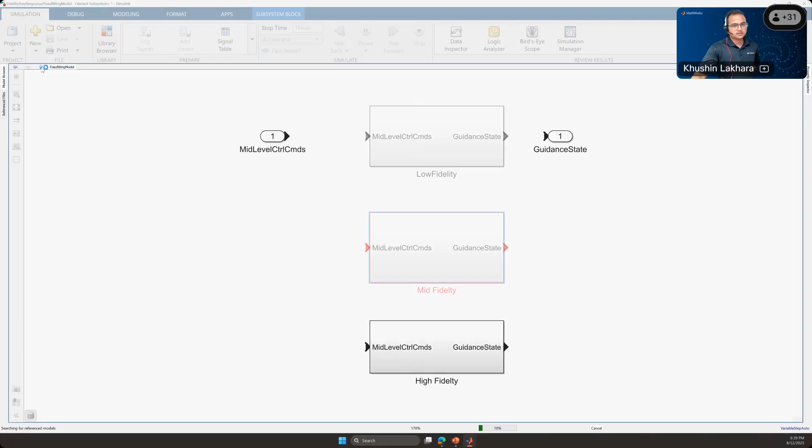So Ishant is telling you are right now at the medium and high fidelity models. Good. Any other team? Ishant, from which institution are you?

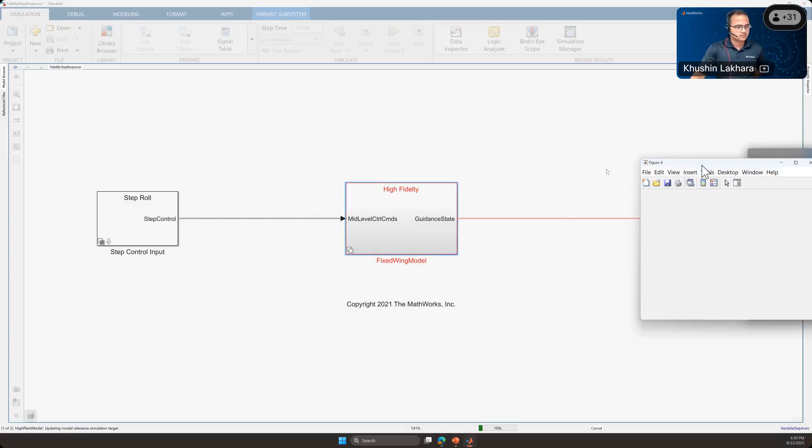Let me just drag and drop this one. So again, we can see how our response was for the medium fidelity model, which is in the dotted blue line, and this more like a red line we have is going to be for the high fidelity simulation, and we see how the variation is coming.

Ishant is from NIT Uttarakhand, thank you.

So we see that as we bring more and higher fidelity models, we see how the controller we designed is performing with our vehicle. There is always an area of improvement that you do, and you bring your flight vehicle close to this. Even when your high fidelity simulations are done and you fly the vehicle, you may find that due to manufacturing deficiencies, data acquisition changes, or environmental factors, your performance may change.

So there is another option to capture all this data, flight data from your vehicle, and comparing your simulation model and flight model. If any team is interested to work with us on this, please feel free to directly reach out to me on LinkedIn or at roboticsarena@mathworks.com. I'll put that email ID here.

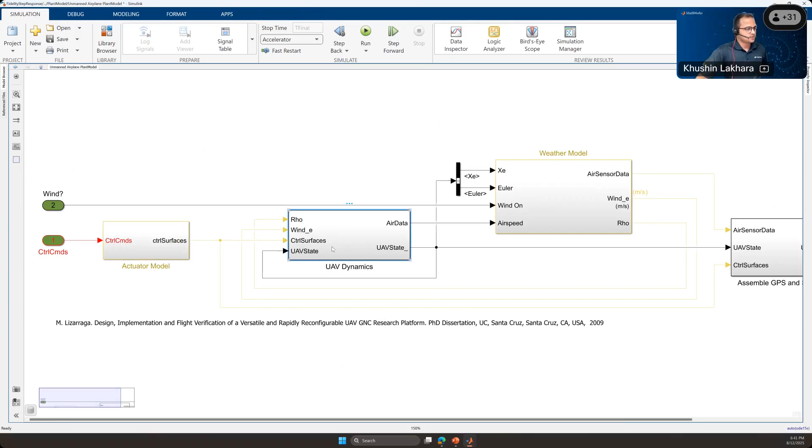So you can see all of these simulation models, but now let's get into the Simulink model and see what is in the high fidelity model. In the high fidelity model, you see I have this plant model which is getting UAV dynamics. All the forces and moments were calculated, and forces and moments are fed to the 6 degree of freedom equations of motion. That's where we started learning how the 6 degree of freedom model works.

But along with the 6 degree of freedom model and forces and equations, it has the weather model, it also has the GPS and state data, so it has some sensors as well. Using all of these scenarios and parameters, you actually navigate from low fidelity modeling to high fidelity simulation, and you perform the simulations. So now that's how you do it all.

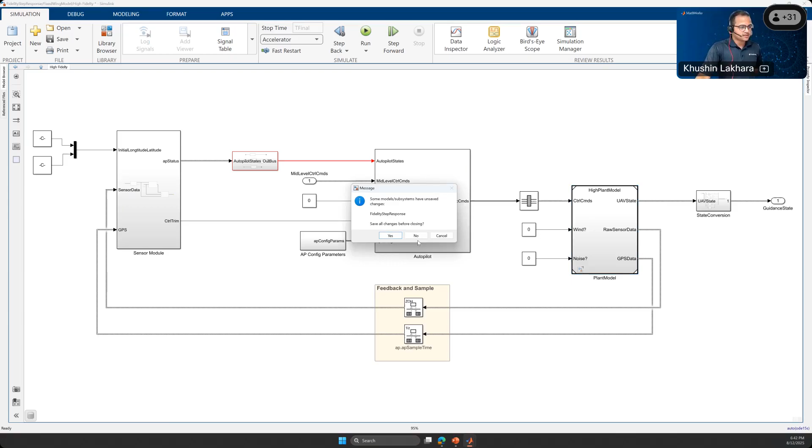I know we are close on time, but let me show you another exciting thing. Are you guys interested to see the package delivery example that we have? Are you excited to see how a drone goes into a US urban environment and delivers a package from one location to another?

Looks like all the students have learned that I'm not moving forward without their yes. Oh, great, guys.

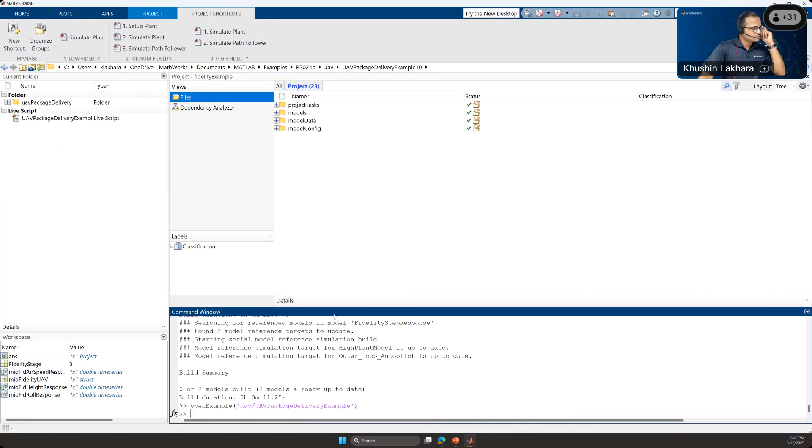So when you guys are working on your models for AeroTHON, if you face any issues, always feel free to connect with me on these models. Just a minute, guys.

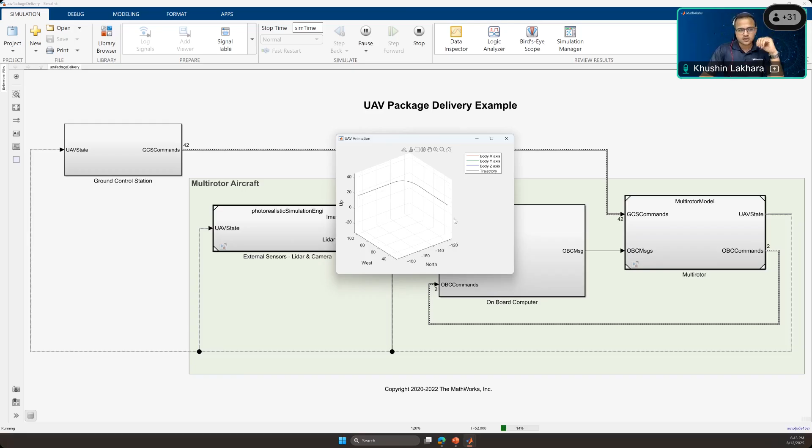Let's see this. For this simulation, my UAV started running and going there. Let me rerun it to show you how it's working. This is working in a low fidelity model now, so you'll see a very simplistic setup. The rotorcraft came in, took off, and moved into this environment.

But let me show you this in the actual form we want to set up. This package delivery example lets you set up a cuboid scenario as well, with obstacle avoidance algorithms and photorealistic simulation. So I'm going to connect it with my ground control station.

Most of you would have heard about QGroundControl and Mission Planner. What are these? They are nothing but ground control stations. Using a ground control station, we can always make our vehicle run in the simulated environment.

Let me set it to photorealistic simulation first and fly this plant. Let me fly the full mission here. Where is my Simulink model? Okay, it's available here. Now my ground control station is also ready.

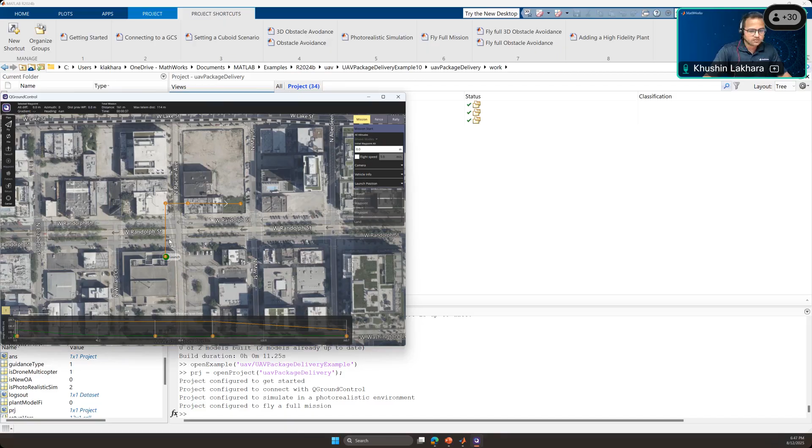Let me open the storage. Missions — why don't I see any missions here? No worries, let me get the mission file.

So this is my mission plan that I'm going to put up on my vehicle and try to fly it. Let me set up the QGC also along with it. So my ground control vehicle, you can see it got armed here. Let me bring the simulated vehicle here. So this is my simulated vehicle also coming into the scenario. Now it's time to run this.

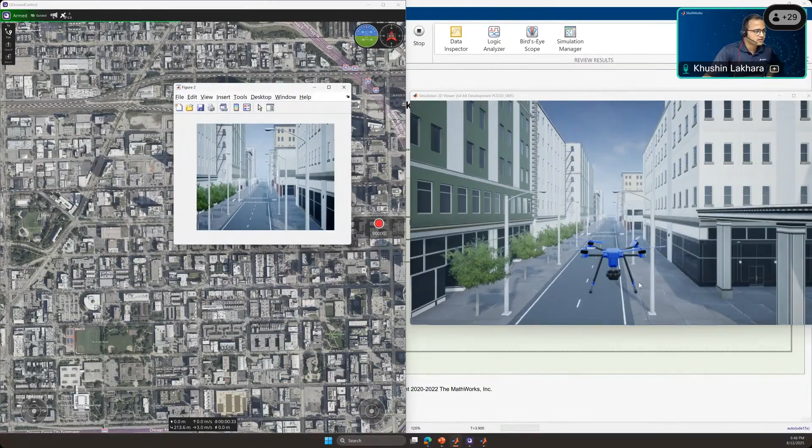Okay, this is starting, and we can see it actually running through the simulation. A camera sensor is modeled here, gathering all the images that our rotorcraft is seeing, and we can see my vehicle following, and the vehicle moving. My flight path didn't get uploaded, so we don't see the exact point-to-point performance, but if I rerun it, it will work.

How do you connect QGC with MATLAB? We have a script for that. It's done via UDP communication. In MATLAB, Simulink has UDP communication protocol blocks which are used. Don't worry about it — in the next webinar we will talk in detail about all these things, and you can learn how to bring various IP addresses, how to connect to a remote vehicle, how Mavlink works, and how UDP communication works.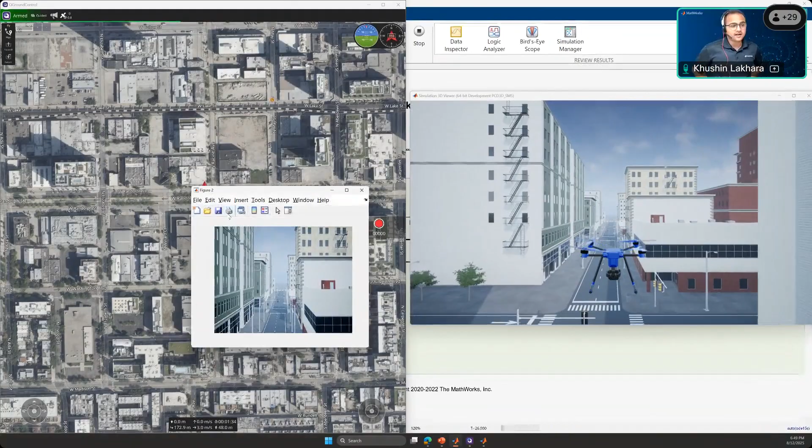You can see in the QGC ground control station, my vehicle is continuously moving and it has taken a turn as well. That's how you can plan your mission with QGC and implement it using Simulink with photorealistic visualization. You can get pictures here from your camera, collect them, and feed them for your neural network, image processing, or computer vision system training.

Does it sound exciting, guys? Does it sound something which would be useful for you? Yes or no, guys? Oh really, really good to know. It's interesting.

In the simulation workflow, we start by bringing the flight dynamics modeling. We talked about 6 degrees of freedom modeling, and then thought about not having all the parameters of aerodynamics and propulsion already. Can we still work with it? So we went for low fidelity modeling, medium fidelity modeling, and also talked about high fidelity modeling.

We see this environment is ready, the drone is actually getting launched, it took off, and now it's getting landed. So your complete autonomous mission part that you want to do, you can do it. I forgot to bring this picture, but a LiDAR was also connected, which was giving all the information.

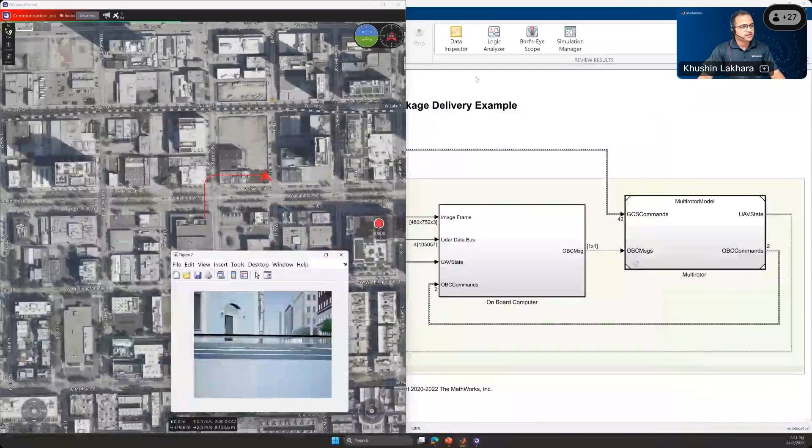Now my vehicle has landed, and you see here where we saw the arm, it now shows communication lost because my Simulink has stopped the simulation. That's how you can see it stopped, and that's how our simulation works. Isn't it quite interesting, guys?

Now I'll not get into the details. You can see there is a cuboid scenario method also available, but we are on the crunch of time, so we will not get into it. But I'll show you another demo which we shared during the AeroTHON last year.

There was one team, Bits Pilani Goa, which used synthetic data generated from this example, from this demo, and they retrained the model during the competition. This team actually won one of the autonomous award competitions for this. So let me just bring the demo that we have. Last event is bad, my bad.

Okay, so now we are not going into bringing so many fancy things. We talked about synthetic data simulation, sorry, we talked about flight simulations. Now the idea is to bring it in a very simple way. Think about your flight simulation is ready, and somehow you are getting your position and altitude. We talked about simulation 3D scene configuration environment.

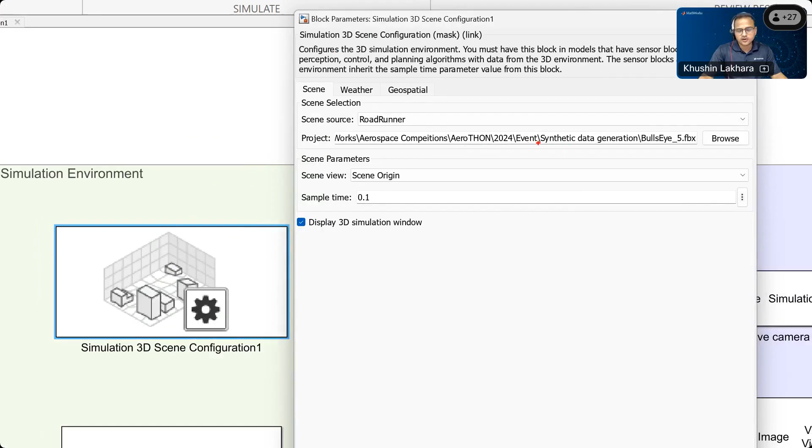So you have a simulation 3D scene configuration environment from where you can bring this. You can see that in the Roadrunner, we have created a scenario for the aerospace AeroTHON 2024 event. This is a synthetic scenario we created, and we put it here, and we bring this simulation 3D camera.

Before we get to the simulation 3D camera, see this: this is a UAV vehicle, and its type is quad rotor and color is black, but focus on this name. Let me focus it back. Its name is Simulink Vehicle 1. Please note it. Now, if I have the name of the Simulink vehicle which we want to use...

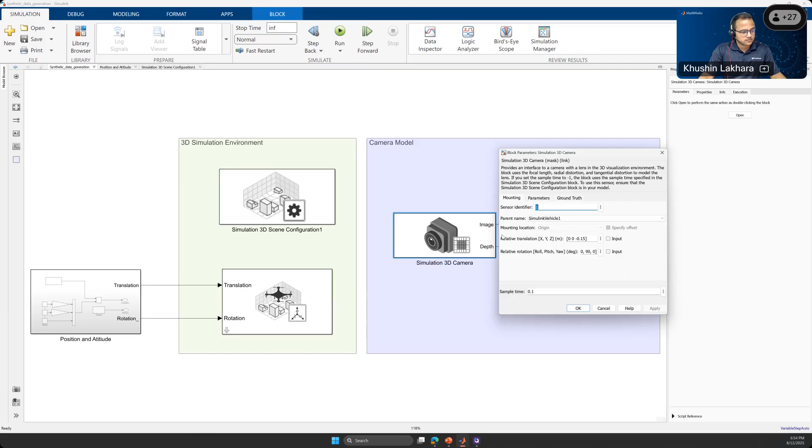I'll bring the simulation 3D camera from your computer vision toolbox here, and I can actually put the camera on it. You see this, where is it mounted? It's mounted on the Simulink Vehicle 1, parent name Simulink Vehicle 1. Compared to CG, what is the relative location? You see this relative location we put up as the translation XYZ, relative rotation roll pitch, and that's how you set up your camera.

Now let me do it in a very simplistic way. Let's run this model. This is not a very crazy model; we have just done a simple thing where on the simulation we have set up a camera, and it has a video viewer as well.

Okay, now you see this. That's what my camera is seeing because this is above this, and it has a MathWorks logo, which is actually coming inverted. Maybe it's put as inverted, but I see my drone is not moving. So let me change some parameters and redo it.

From the simulation 3D camera, we are getting a video viewer and image simulation output. We know this simulation already, there are some videos already available in the viewer. So I want you guys to give me a specific name in the chat, your team name or anything you want me to name this recording. Whoever gives me the first name, I'll choose it. Let's make it the third name.

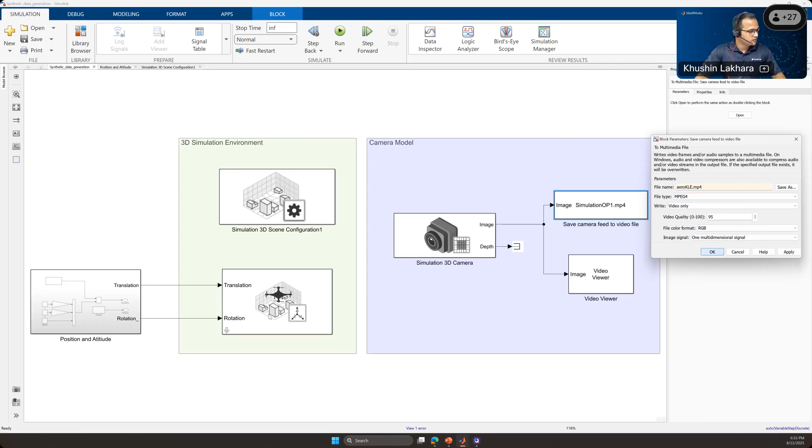Okay, AeroKLE, Aroha. So I'm putting AeroKLE.mp4. This file we are going to get, and in the position and altitude, I'm going to put this as— the position was fixed, but now let me put it as in a circle. This is synthetic data generation model. Let's run it and see how the performance comes up.

So that's my simulation 3D camera came first, and where you can see this, my vehicle is continuously moving.

Okay, now we see this, there is no movement here, but we are seeing this is moving. So there's some issue. Let's correct that issue. What is it? Quickly. So what's happening here is the simulation 3D scene configuration. If I go and see the scene view, I have put it as scene origin, right? Scene view as scene origin, and that's what's creating the mistake. So let me change it to the Simulink vehicle 1, and then let's go for it.

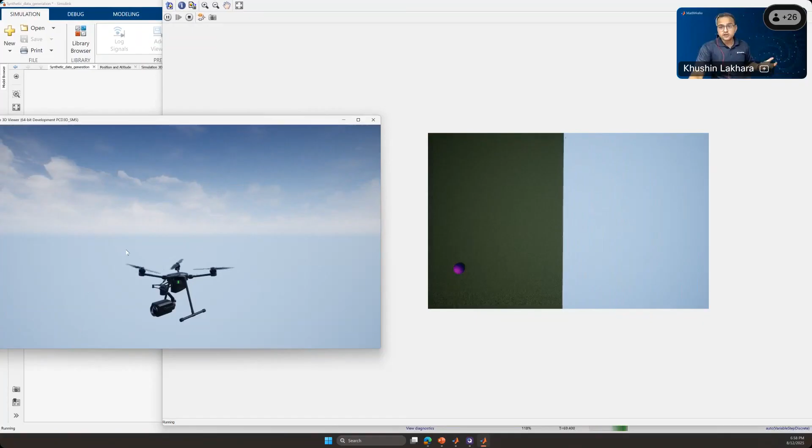So we have taken some parameters for considering these videos. You can play with these parameters, but let me now quickly show you how this video is saved and how you can convert this video into images. Because in the third session, when Shovik shows you how to pre-process the data and use your image data for model training, this synthetic data will be useful. A combination of synthetic data and actual flight data that you capture will make a very good mix to train the data, and you'll see superb results. So you don't need to worry about them introducing some new object you don't have data for. How are we going to fly this? You don't need to worry about it because all this can be done.

So this stop time is infinity, so let me stop it because it will keep running. But now let's go here and let's see if we do have AeroKLE.mp4. And that's what we see here. Do you see AeroKLE.mp4? Let me just run it outside MATLAB and show you.

So now, do you think you can capture the data for your simulation, for your AeroTHON competition, and make it? Yes or no, guys? Now I'll quickly show you how you can convert it into images.

So we have created a simple live script. I'm not getting into the detail of how you set it up and everything, but let me directly put it as images, AeroKLE 1. Okay, let me do another thing. Let me take the name Aroha, right? Aroha has mentioned her name here, so let me put it as images Aroha.

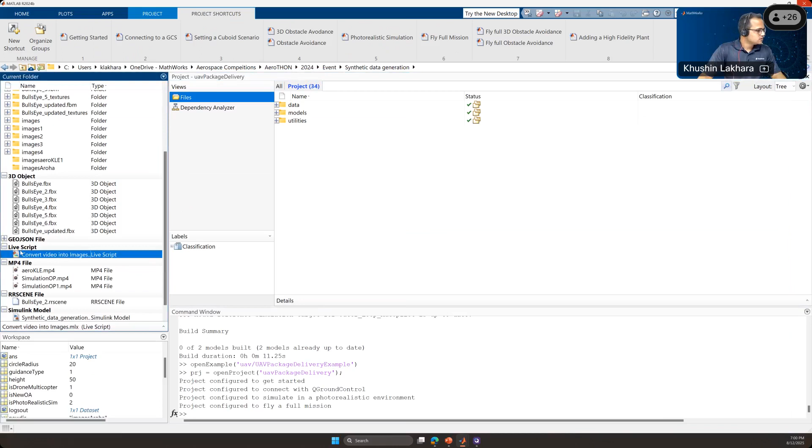This I'm going to set up. This will create a directory. Now the simulation video, I have the AeroKLE.mp4. Let me just copy paste its name so that it doesn't cause any issues. For select video file, why am I doing all this effort?

So we come here, we come here, we come here, simulation output, so I see AeroKLE. Let me take it. And with this AeroKLE file, let me run this, create image sequence. This is just to change your video into files and create all the images. So you'll see, once this runs, we'll have all the images ready.

So this is running, but in the meantime, let me check where our folder is. Images are getting here—images AeroKLE, you see this. The number of images, we have already generated over 2000 images. Sorry, more than that.

So that's how you can do the synthetic data generation. I hope you guys liked the synthetic data generation. Let me know if you guys have any doubt about these demos.

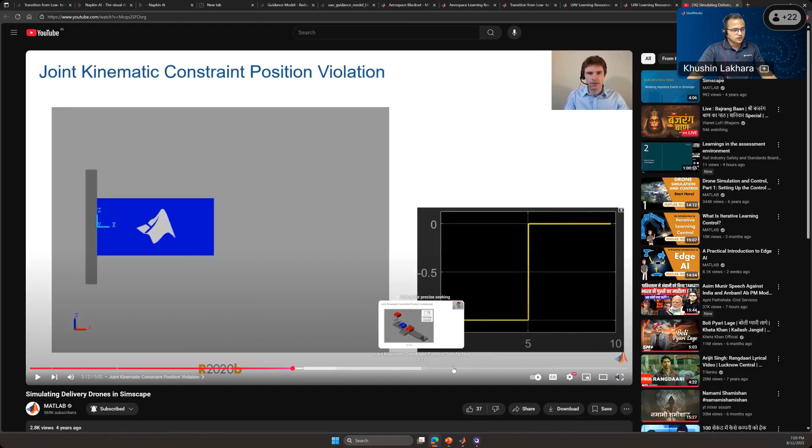There's a specific video on simulating delivery drones in Simscape, where my colleague Sam Hunt discusses in detail how to build this and do package delivery. I haven't covered this demo in this session since the video is directly available, so please feel free to go through it and learn.

Moving forward, if you're doing flight data access or analysis, there's another section for developing your autonomous algorithms, which may include computer vision or deep learning algorithms, covering autonomous navigation, sensor fusion, motion planning, robotics, and perception for UAVs.

Finally, if you're working with ROS, you can go for it, but my personal understanding is you can do it without ROS for AeroTHON. You don't need to complicate it with ROS.

Finally, for implementation, especially for your PX4 or Raspberry Pi if you need it, there are code generation capabilities available. You can explore the UAV code development with Simulink webinar, which has a detailed video, but in the next webinar I'll talk about that in detail. Check there as well. I hope I could answer your question; if there's anything else, let me know.

Ishant is asking: sir, where exactly do we design the environment setup for visualization? Which type of file do we use for it? Okay, that's a good question.

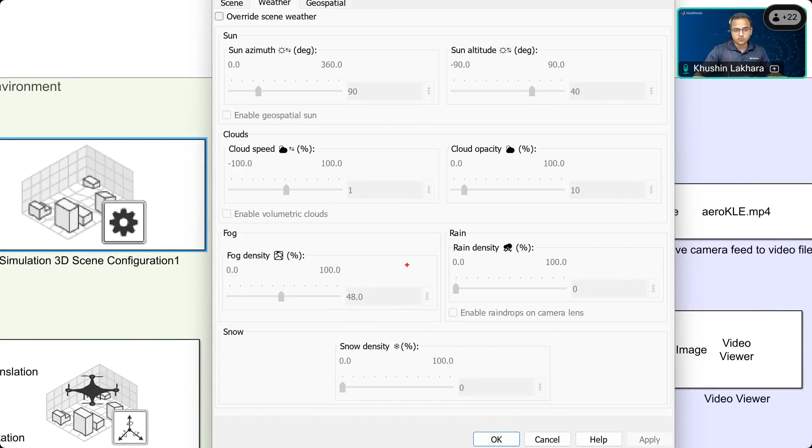Environment modeling in the flight dynamics — that's what we need to do. So I hope I could answer your question, Ishant.

Okay, okay, thanks. Is there any other question, guys? Okay, no queries from Ashish.

Okay, what topics would you like to learn in the next session? I know we have a set agenda, and I know we talked about it, but specifically, if I would ask your interest, what are the few topics that you want to learn, so that I make sure that if it is not already covered in the topics, I bring them here and we cover them.

So this is the US city scene I'm going to run. Hope I have put up the US city scene again there, or let me just recall it. Okay, Roadrunner — let me cancel the Roadrunner. Bring default scene, which is US city block, and let me run this scene.

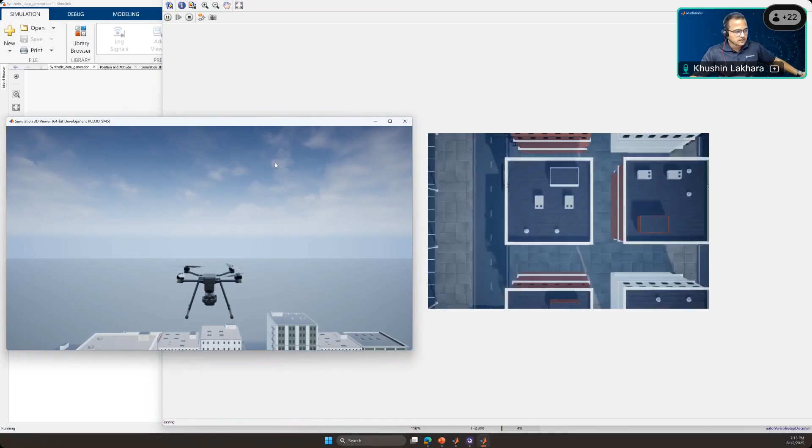Okay, so in the next session, we are going to talk about how you do code generation from Simulink models. You saw today that we had the various Simulink models — in the Simulink model, we have the guidance controls. So how do you bring these together and how do you create all these scenarios? That's what we are going to talk about. We'll also talk about how you deploy the code to Raspberry Pi and Jetson GPUs. That is going to be the topic of our next session.

But you can see this is a very well-built US city block environment where we are gathering the data using this. And that's what we tried — at the starting of the webinar, this was our goal, to get into this: how can we create simulations like this? So these are going to be the simulations.

So how do you implement obstacle avoidance algorithms? We are going to talk about that in the next webinar. But let me know if we could succeed in the goal of today's webinar, to learn how can you develop the simulations for AeroTHON, especially the flight simulations. Let me know if we succeeded or not.

Okay, Ishant and Ronak are saying yes. So Ishant and Ronak, now remember, I'm also in the jury panel of the competition, and I expect you guys to implement this in the AeroTHON. If you guys have any doubts, please feel free to reach out to me. We are always there to support you and help you with these workflows. Please feel free to connect with us and write your queries. We have a dedicated team of engineers who actually support the competitions.